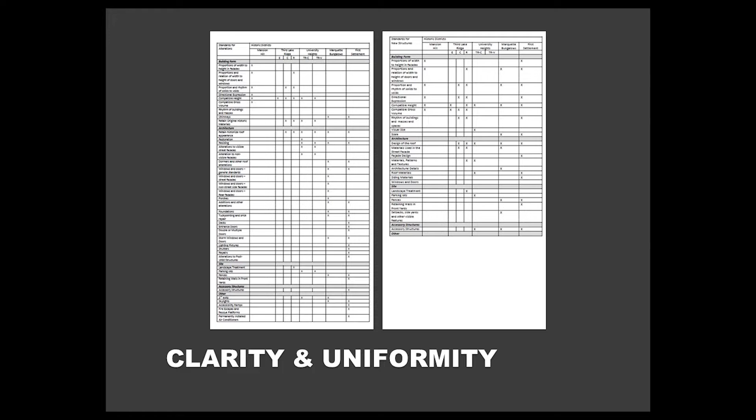One of the things that we immediately looked at when we started this project was that each of the districts has their own set of standards and they vary greatly. The districts that were landmarked years ago have just a handful of standards. The districts landmarked more recently have a ton of standards, and these matrices were on some of the tables during the round 1 meetings, showing graphically the great discrepancy between the districts. So we're suggesting for clarity and uniformity that there may be a way to level the playing field, so to speak, between the districts, which would certainly make interpretation issues a little easier on commission members.

Now, looking at standards, when the ordinance was passed in Madison in the 70s, it was a top of the line ordinance. Through the decades, though, there's been this thing called the Secretary of the Interior Standards, developed by the National Park Service. They're an industry standard, used coast to coast, and they are incorporated by reference into Madison's preservation ordinance. There are 10 standards. They're very vague and basic, but they're kind of a baseline for historic preservation in communities all over the country.

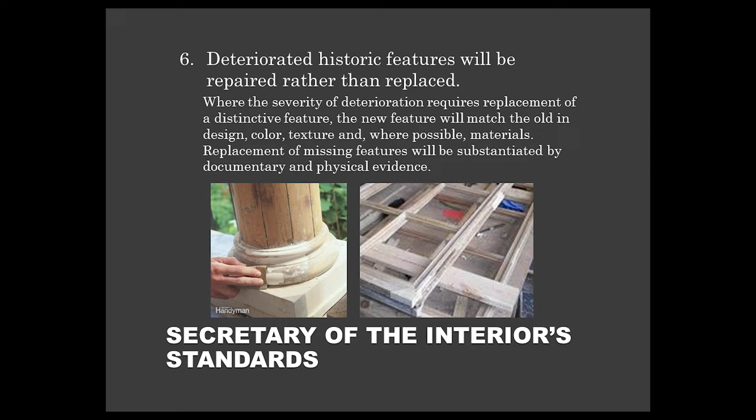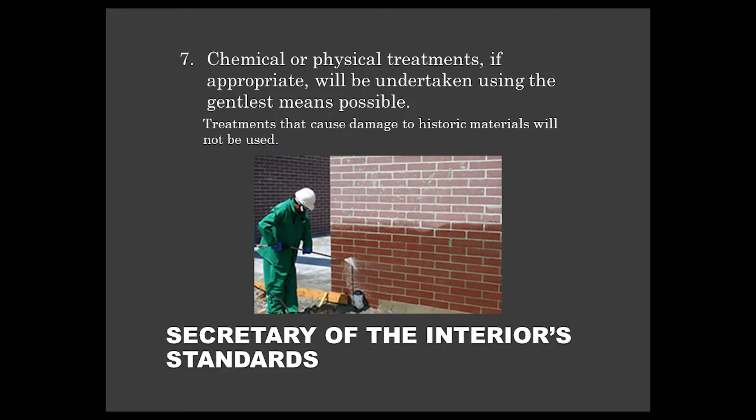So the first standard is a property will be used as it was historically or be given a new use. Second, the historic character will be retained and preserved. Third, each property will be a physical record of its time, place, and use. Fourth, changes that have acquired historic significance will be retained and preserved. Fifth, distinctive materials and features will be preserved. Sixth, deteriorated features will be repaired rather than replaced. Seventh, treatments will be undertaken using the gentlest means possible. Eighth, and this really doesn't particularly pertain to any of the districts, but archaeological resources will be protected. Ninth, new construction will not destroy historic materials and features. And tenth, new construction will be undertaken in such a manner that the integrity of the historic property would be unimpaired.

So those are a national set of standards. Now, we also realize that we want to give property owners options. So we've been talking internally about a spectrum of standards for review for your property. And I think the first thing that we need to look at when contemplating any property is period of significance.

So for University Heights, the period of significance for the district is 1893 to 1928. There may be individual landmarks also within that district too, which have their own period of significance. So one of the things we want to think about when revising the standards is knowing your period of significance: are you in the period of significance in the district, or in an individually landmarked property, or in a property that's outside the period of significance for the district? There may be different standards for those things, and we heard that time and time again at the round one meetings for all the districts.

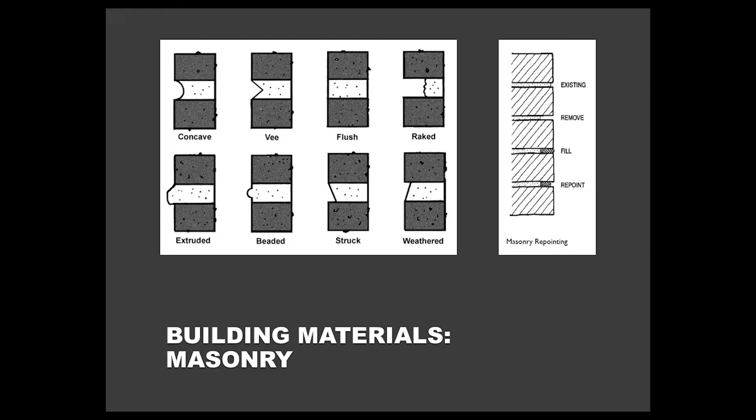On the left, you'll see a variety of different tooling types that were very popular and common. On the right, you'll see the proper way to do a tuck pointing project. At the top it says existing, and shows how it was tooled. You need to remove a good chunk of it, fill it in, and then tool it so that it matches. These are all very important details we look at when evaluating tuck pointing projects.

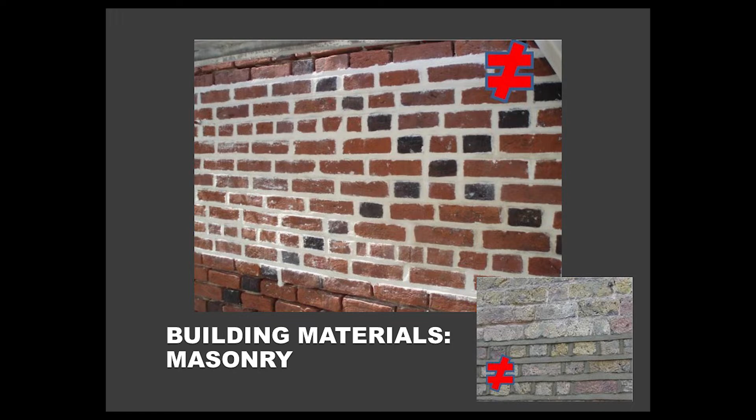When you see these red equal signs with a slash, that means it's not equal - these are bad examples. Here's some bad examples of a tuck pointing job. The tooling doesn't match up, the mortar doesn't match up, and these things happen all the time. We have these standards here to try to help you so this doesn't happen to you. But here are two examples of a really badly done tuck pointing job.

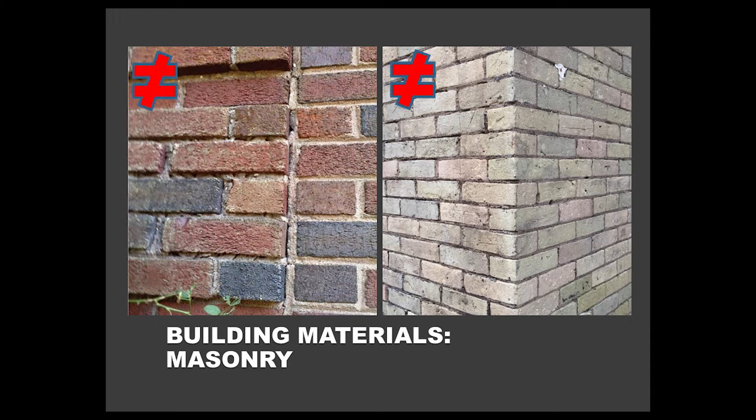These two photos are showing the ramifications of abrasive cleaning techniques. On both photos, on the left-hand side, they used either sandblasting or really high pressure water, and the mortar was blown out of the joints. On the right of both of these pictures, you can see they used a proper cleaning technique and the mortar stayed in the joints.

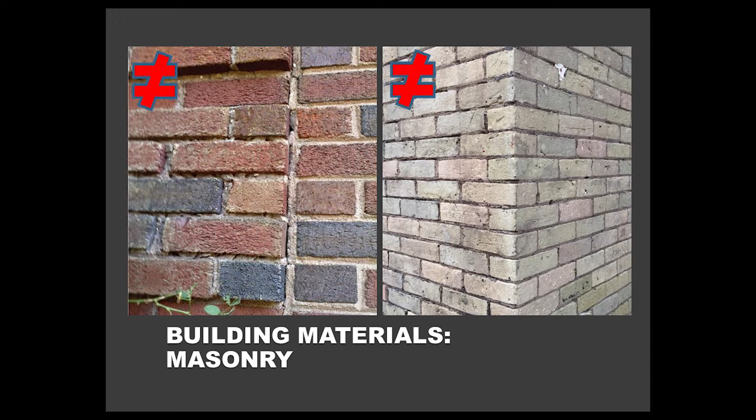This picture is from a historic tax credit project I worked on, and the mason was fired. The owner had to - on the left was one mason, on the right another mason came in to finish the project because we fired him mid-project. This stuff happens all the time from very reputable contractors that say they know what they're doing, but sometimes they don't. So sometimes these standards are here to help you from having these problems.

Now, how many of you have wood on your buildings? Great, good. Wood is one of the most essential materials used in American building of every period and every style of architecture. Its many and varied attributes make it suitable for multiple uses, including structural members, siding, roofing, and decorative features.

The sawmills were some of the first buildings built in every community as they sprung up, and they cut timbers into boards, and any ornamental features were all done by hand before the Civil War. After the Civil War, mechanized production increased efficiency, and wood's use in building construction greatly expanded. With more efficient production came lower costs, but also the standardization of ready-made moldings and assemblies for windows, doors, and other decorative features. Wood selection and construction practices have always capitalized on its attributes and compensated for its weaknesses.

The resistance to decay made white oak and cedar common choices for roofing shingles. But contrary to that, pine and yellow poplar have been used for siding and trim because of their straight grain and ease of milling, but they weren't very decay resistant, so you always needed to paint them to protect them from decay. So the majority of practical and decorative features are often made of wood in buildings.

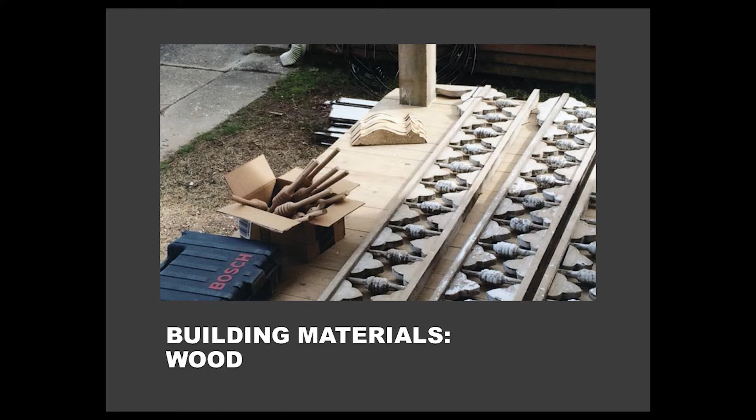Metals. Who's got metal on their building? Anybody? It's a little rare, but metal is commonly used in historic buildings, and all kinds of metals from lead, tin, terneplate, zinc, copper, bronze, brass, iron, steel, aluminum, stainless steel, and the list goes on and on. Historic metal building components were often designed by highly skilled artisans. By the late 19th century, many of those components were prefabricated and available in catalogs. You could just order them.

Wrought iron was one of the first metals to be commonly used. It was used for nails, tie rods, and hardware, and then it gradually increased in size to larger pieces for balconies, railings, porches, steps, and fencing. It wasn't really used for structural components until around the mid-19th century when manufacturing equipment became more sophisticated.

Cast iron was next. It was used to make columns, which started in the 1820s, but then they started making entire building fronts out of cast iron, and other decorative, structural, and ornamental features followed soon after. Then came steel, which played an important role in developing high-rise buildings.

Zinc coating on steel and sheet metal created galvanized iron, which was used for roofing and decorative roofing features such as steeples and roof cresting, and other ornamental architectural features like door and window hood moldings, lintels, and oriel and bay windows.

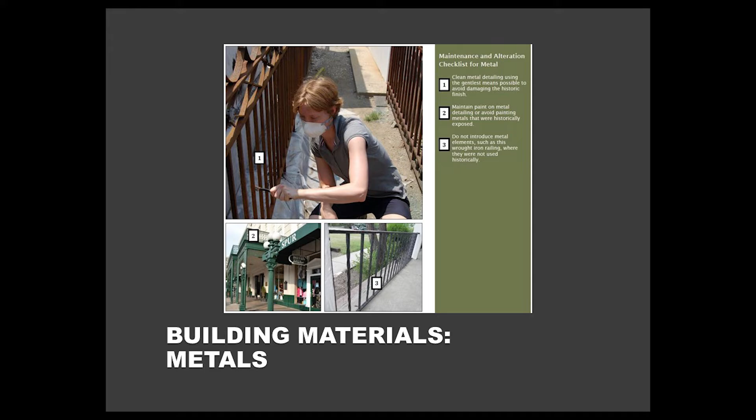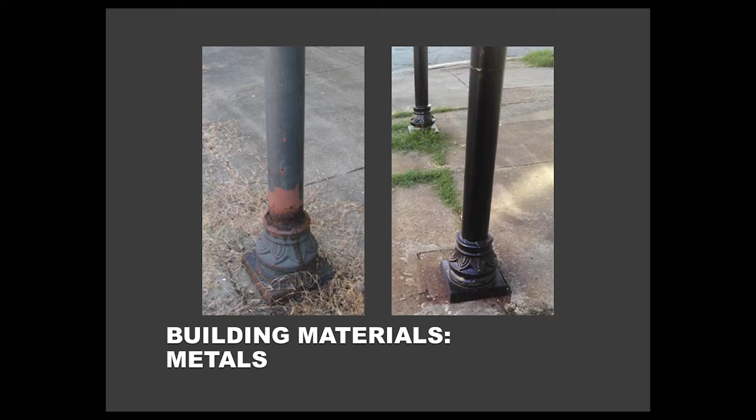Now, metal can be a very repairable material too, if you catch it from rusting through early enough. You can simply take a wire brush to it, get that rust off, and it's really important to keep it painted. Common maintenance solves a lot of problems. Here's some columns where it's rusting at the base. Again, scrape or sand off that rust, get it repainted, and it keeps looking good for a long, long time.

All right, who has a roof on their building? Okay, just wanted to make sure you guys are all awake. The roof, with its forms and features like dormers, cupolas, and chimneys, is a really important design element of many historic buildings. In addition, a weather-tight roof is essential to the long-term preservation of any structure, historic or not.

Throughout all periods of history, wood has been used for roofing. Wood shingles remain the most common roofing material throughout much of the 19th century. After that, clay tile and slate were introduced. Both provide fire protection in urban areas. The use of slate expanded quickly in the second half of the 19th century with the development of the railroads that could bring slate all over, and it remained a preferred roofing material until the middle of the 20th century.

Lead and copper came next, and they were the first metals used for roofing, later joined by zinc and iron. Galvanized steel, when that came around, could be stamped into sheets that simulated shingles and clay tiles as well.

Concrete roofing tiles began to be produced as a substitute for clay roofing tiles. About the same time, composition roofing, like built-up roofing or roll roofing, was developed for flat roof solutions. In the 20th century, asbestos fiber cement and asphalt shingles came into play, which is probably common for what you guys have on your homes, as a less expensive alternate to slate and wood. Later in the 20th century, sheets of synthetic rubber and other materials came out for flat roofs too. So it's a wide variety.

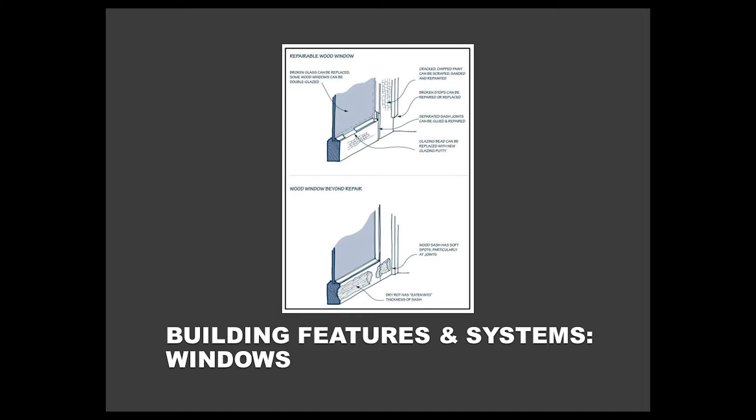Now, when you start talking about replacement, let's really pay attention to the details, because that's what we do when we talk about replacement. On the left, you'll see an original muntin, what they look like, what their profile is, and the picture associated with it. You can kind of see the character that it gives. On the right is an example of windows that people commonly bring to preservation commissions all over the country and say, well, this looks the same, but it doesn't. You don't see the muntin at all, you just see the glare from the glass. That muntin's buried between the glass, and the look is just not the same, and it's not an acceptable alternate.

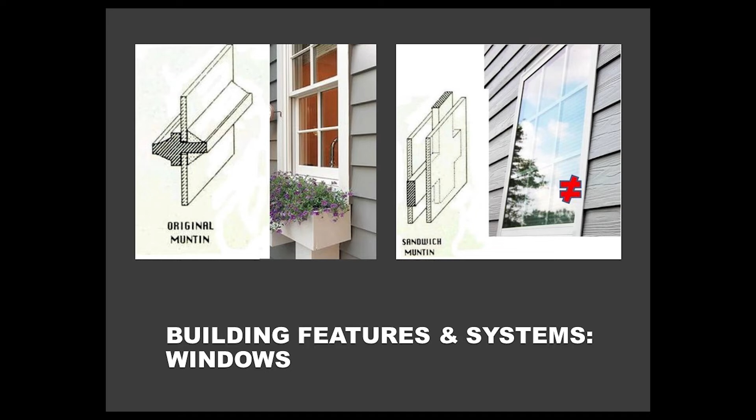Again, the picture on the left shows a historic wood muntin. On the right, it shows an applied muntin that just doesn't look the same.

Here's some more examples of an original window on the left and some improper replacements where they don't fill the opening completely. The one in the middle, the top was flattened out. The one next to it, they flattened out the top and filled in the bottom because they just wanted to use a stock window off the shelf at the big box store. Actually, a lot of window manufacturers, if you tell them the sizes, will easily custom make it, and it's not much of an upcharge. If anything, sometimes it's less.

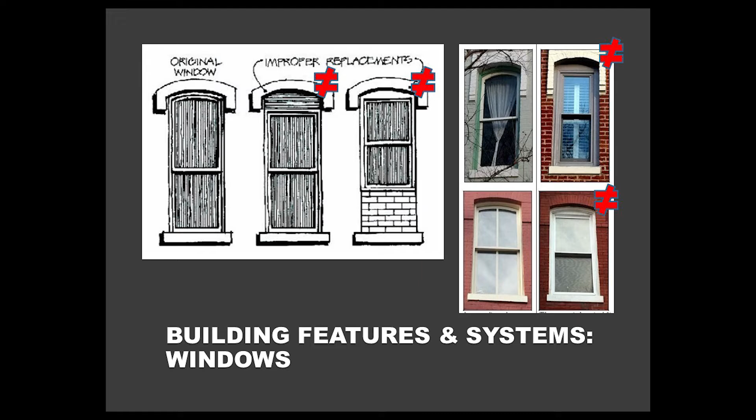Again, here are a couple examples of appropriate replacements where they followed the arch, and then these where they flattened out the arch, and even the one at the top, they infilled the sides too. Again, you can see when you see these side by side, they don't look the same.

Other details we're looking at: at the top you can see a sill profile of a historic window, what that looks like. In the middle, that's kind of what a fiberglass or vinyl window looks like, and a lot of people think fiberglass and vinyl looks the same, but it doesn't. They don't even have sills. So that example shows you there's really not a sill. The whole window, because it's so thin, actually gets moved forward into the opening, so where the glass is isn't even in the same plane as where it was historically.

And then the bottom here is an example of a good replacement and an acceptable replacement profile. It has a sill, and the glass is set back in the opening, deeper, like the original window was.

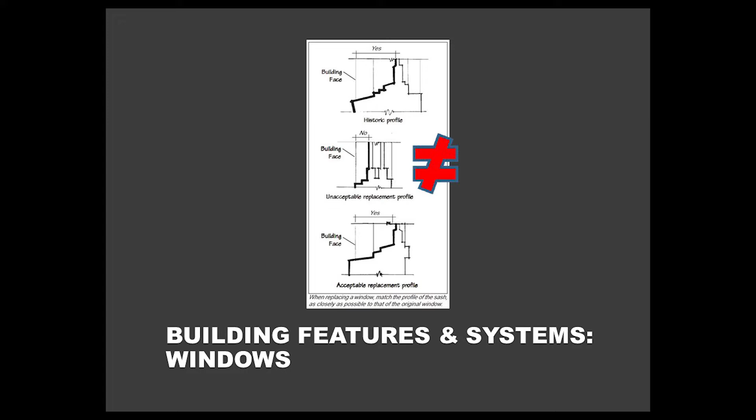Entrances and porches are often the focus of historic buildings. With their functional and decorative features, such as doors, steps, balustrades, and columns, they can be extremely important in defining the historic character of a building. Usually, entrances and porches were integral components of a building's architectural design. For example, porches characterized by turned porch posts, turned railings, and turned balusters were especially prominent and decorative features of Queen Anne style houses.

But deep porches on bungalows and craftsman style houses of the early 20th century featured tapered posts and exposed posts and beams, rafter tails, and low-pitched roofs with wide overhangs. So porches can be a very defining feature of what style your house is.

Late 19th and early 20th century commercial buildings were also distinguished by their entries. Some entries to commercial structures were very recessed, with terrazzo and special tile flooring at that entrance. And some more modern buildings had stainless steel and geometric elements and metal canopies above. So the entry is really a key defining feature.

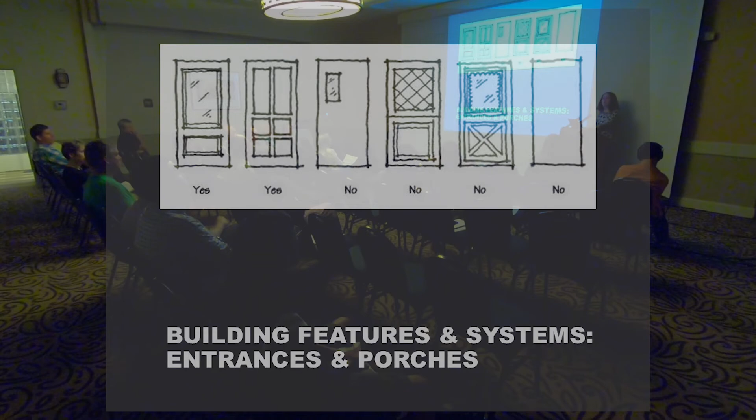Quick question: so if the older materials were wood, say on the door, but had a very smooth profile, could you replace it with something newer that wasn't wood?

Sometimes, yes. I know the cost of a wood door is astronomically more, and it's those little details. Oftentimes it's finding the smooth one, whether it's siding or doors or whatever, because so many of them have that texture in it. And I wish the manufacturers would just stop making this stuff because it would make it so much easier for everybody.

We will at the end. And I should say that first one that says no — if you were living in a mid-century modern house from the 50s, that would be a perfectly great door.

The period of significance in this district goes to about 1928, like I said earlier. So there's an if-and-or-but for everything here, and that's the big one. If you were talking about putting that in somewhere like Nakoma, or wherever - these aren't landmark districts, but you know the neighborhoods - that would be perfectly acceptable there.

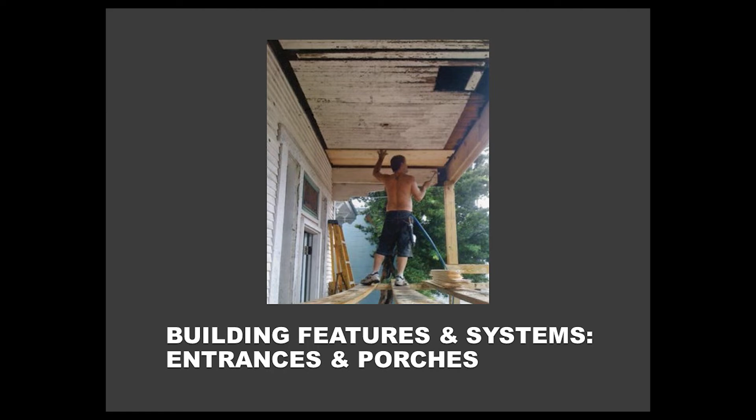Does anybody have a commercial property in the district? I know there's very few. All right, nobody - we're just going to go through this very quickly.

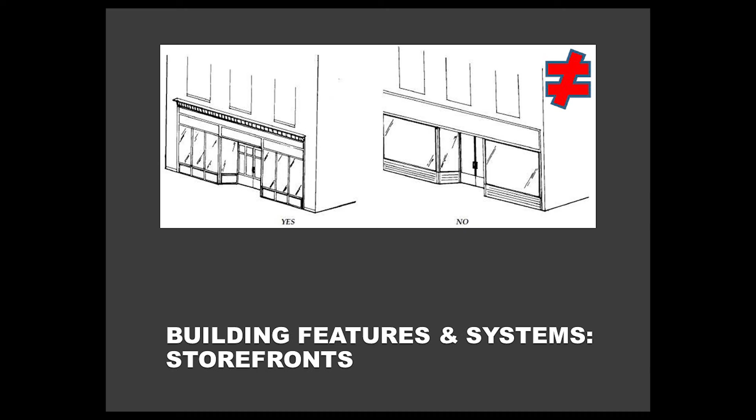Some examples of good replacement storefronts and maybe some poorly designed ones. This is a building not around here, but the whole entire storefront had been rebuilt - very nicely done, fits in great with the building. You wouldn't know that it was a new storefront.

Anybody contemplating any new additions or new construction, garages, anything like that? I'm going to go quickly through this. There's no formula or prescription for designing a compatible new addition or related new construction on a site, nor is there generally only one possible design approach that would meet standards. New construction could really be any style.

Sometimes the easiest thing to do is a simplified version of your historic building. I think one of the big changes that might come out of these ordinance revisions - there are several districts where the ordinance says an addition or new construction must match exactly. That is not industry standard. That's actually something we don't want to do nowadays.

So we want that subtle contrast and that subtle differentiation so that you understand that that is a new addition.

Generally, we want additions on the rear or a secondary elevation to ensure that it's subordinate to the historic building. We want to make sure it's appropriately scaled and located far enough away from the historic building so that the building maintains its character, its site, and its setting. So some of these things we're going to talk about: location, scale, proportion, and that type of thing.

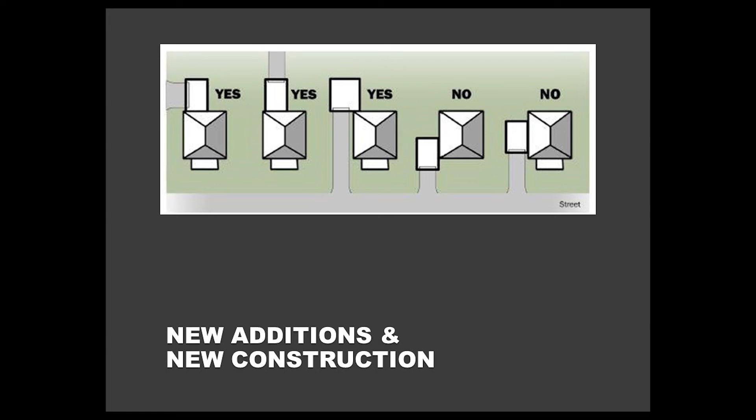But then these two on the right side, not so hot. That garage is too far forward, it really gets in the way and overtakes the character of the house.

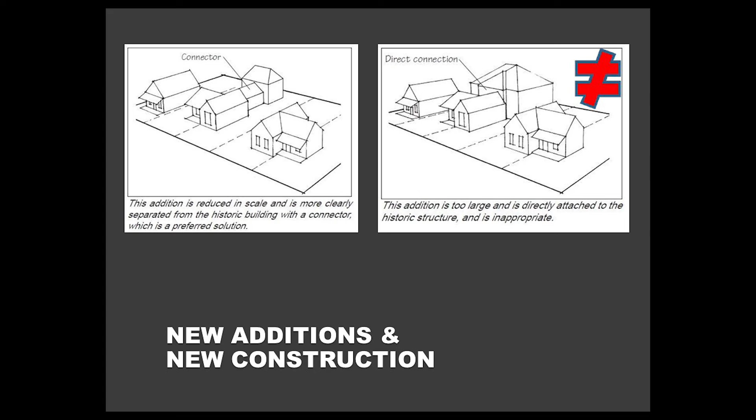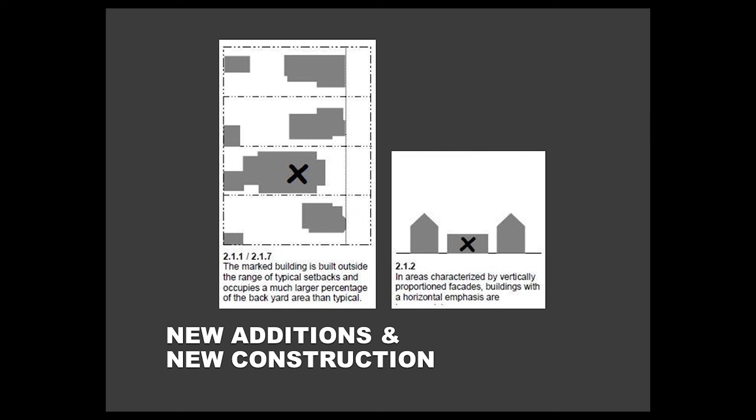Again, here on the right, very vertical houses up and down the street, and then this squat horizontal house comes in - it doesn't fit the pattern. One of these things is not like the other, that's what's going on here. Not to say you have to copy what's there, we don't want you to do that.

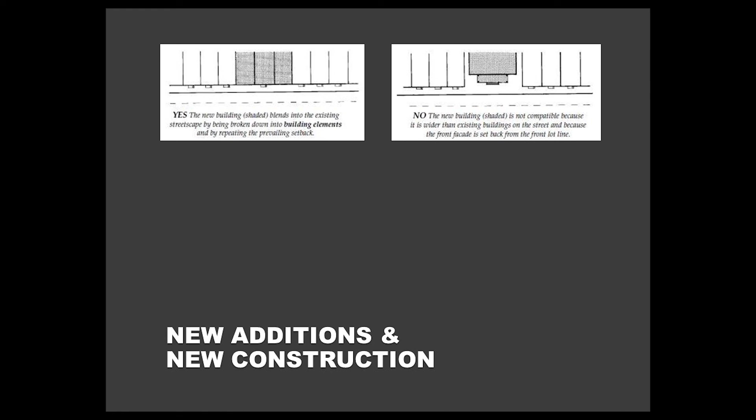This is more in regards to commercial, so I'm going to go through it quickly. Again, these are examples of good additions to commercial buildings.

All right, so that is the end of Preservation 101. And it's going to form the basis of some of our recommendations that we're going to make for updating the standards.